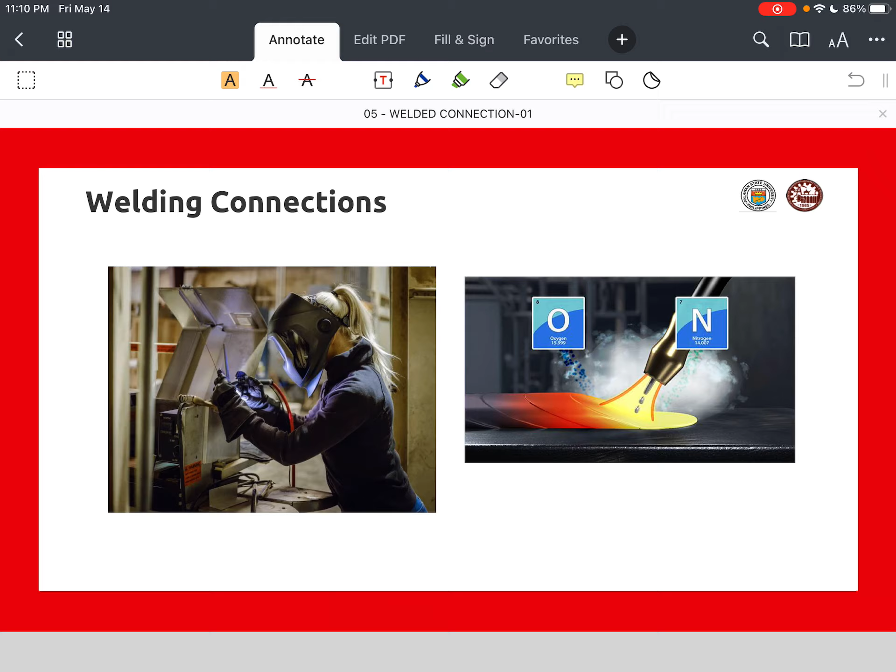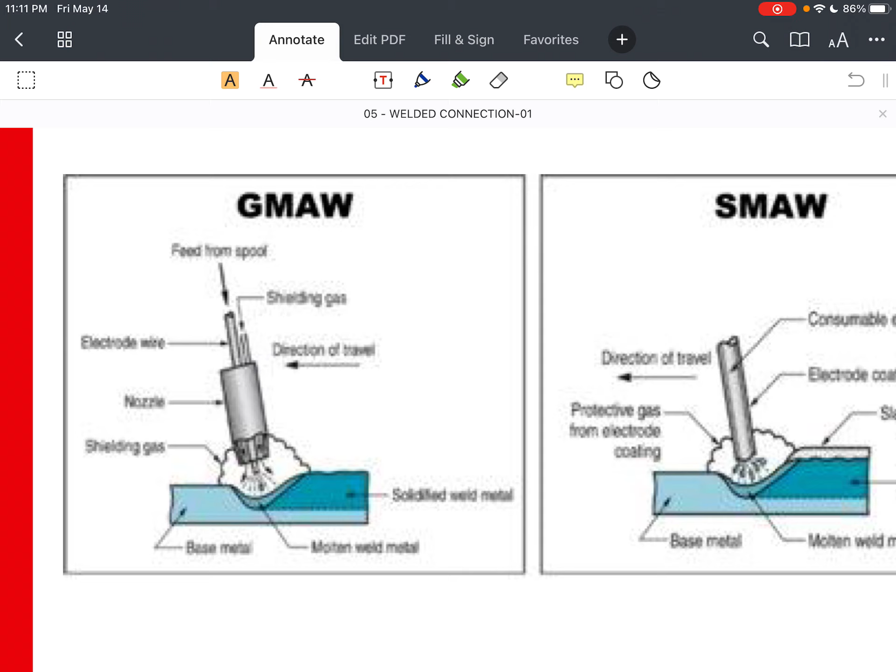Let's go to the welding process naman. So we have here three types of welding process: the GMAW, SMAW, and SAW. Punta muna tayo dun sa GMAW. GMAW stands for Gas Metal Arc Welding or simply gas welding. So, ito yung mas simple and inexpensive na paraan, mas mura. Usually, ginagamit lang to sa mga repairs or maintenance work, mga hindi mabibigat na welding procedures. So usually, ginagamit is gas welding.

Yung pangalawa naman is yung SMAW, which is the Shielded Metal Arc Welding. Ito yung pinaka-common type ng welding. Itong process ito is very versatile and can be used sa field welding. Yung designation nung welds nito is usually E60XX and E70XX. Yung 60 for 414 MPa and 70 for 483 MPa tensile strengths respectively.

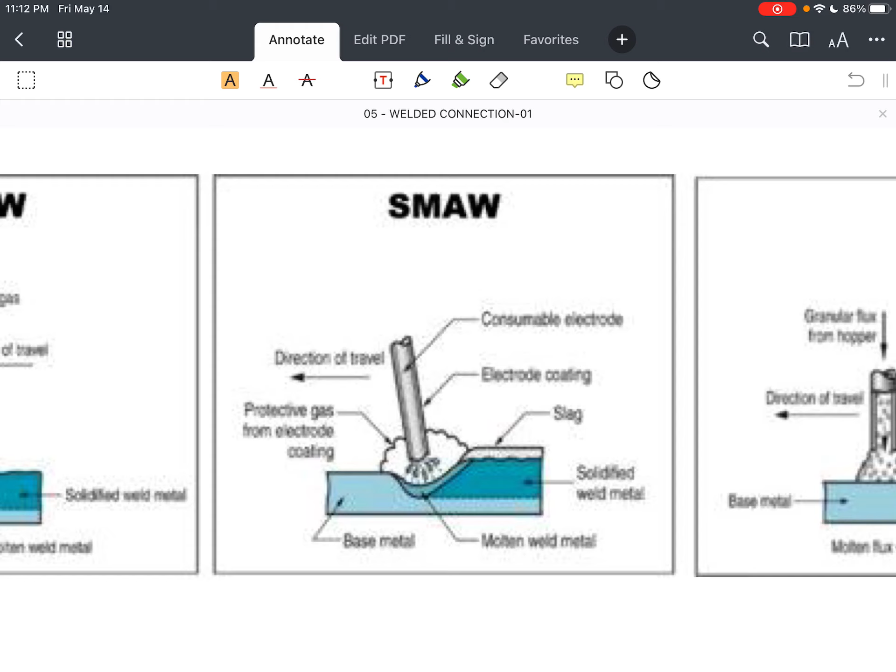Now, the welding rods commonly available in the market is E60. Yun usually yung sinispecify sa mga plano. Dito sa Philippines, ang usually na makikita nyo na specification sa mga structural plans is E60, kasi yun yung mas available pagdating sa market.

So, pangatlo naman na process, we have here the submerged arc welding or yung SAW. Ito naman yung ginagamit sa mga fabrication plants, or should I say ginagamit siya sa planta kung saan merong mga sophisticated na mga equipment na available.

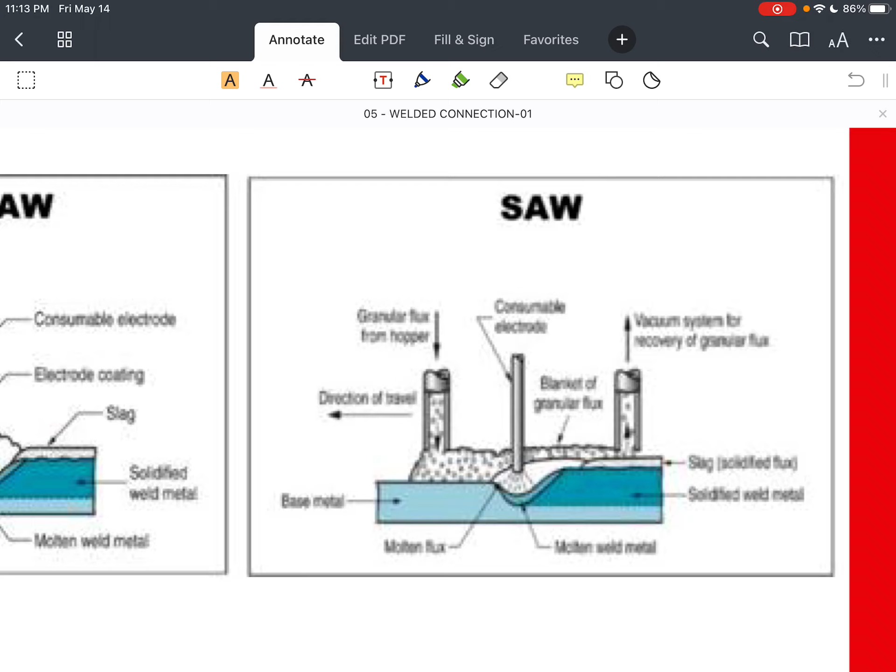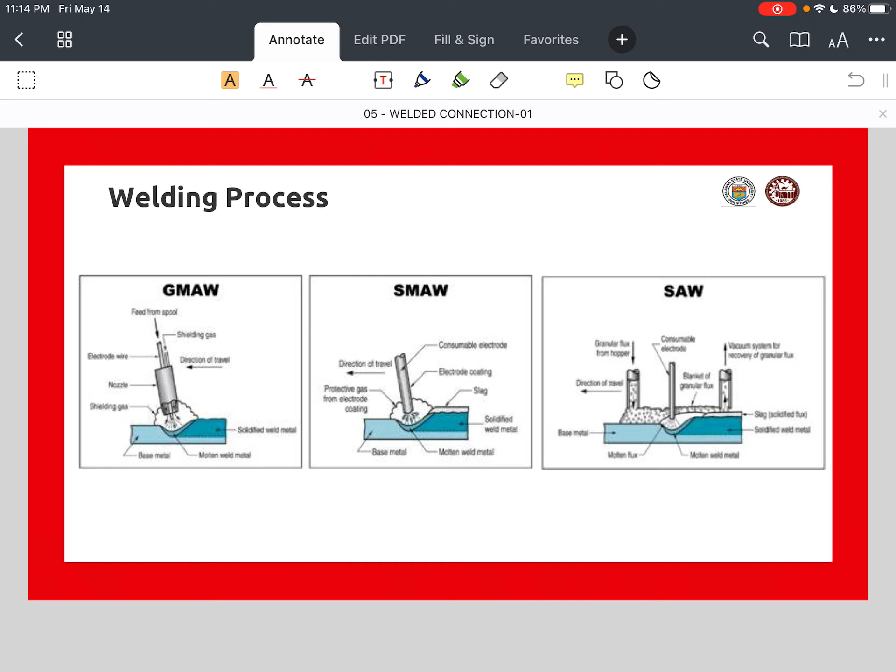Sa NSCP, the NSCP recognizes the SAW as superior among the other welding kasi the weld itself and the base metal is shielded from the impurities in the air, kaya usually sa fabrication siya. So, hindi siya ginagamit pagdating sa site or pagdating sa field. We also have other process, but majority is itong tatlong process na talaga.

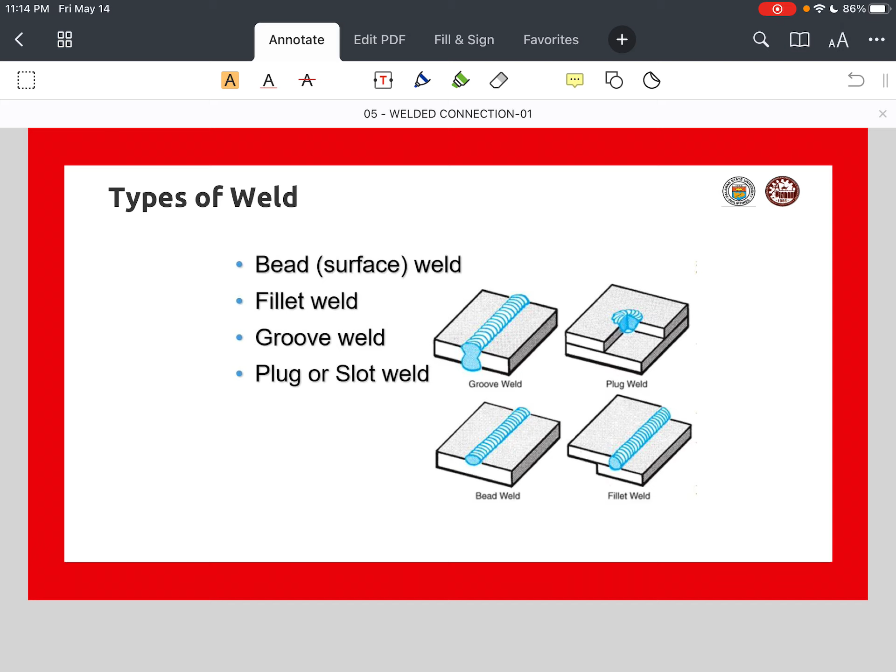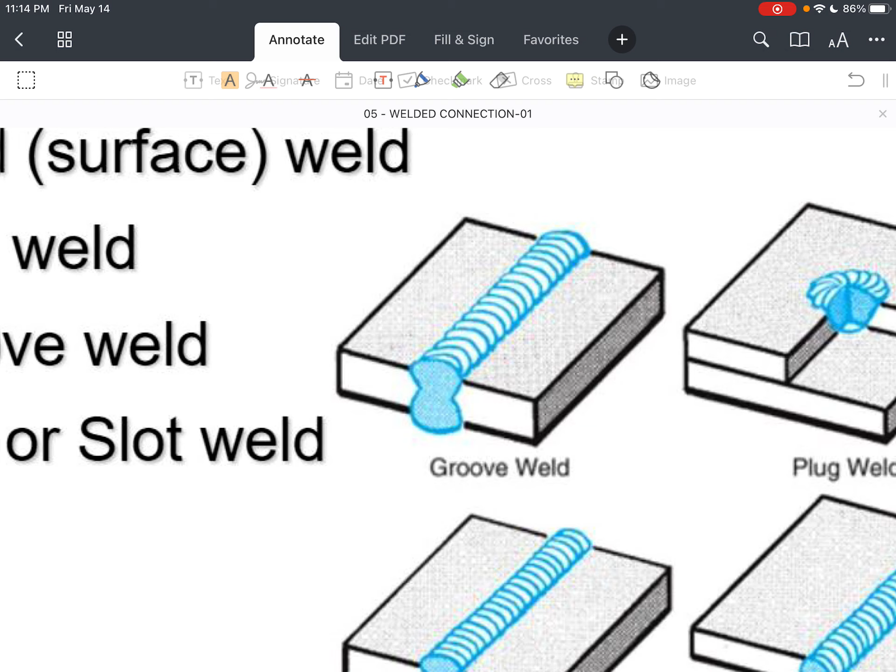Now, let's talk about the types of weld. In this picture, we have four types of welds, but we will just go on to the three. So, first is the groove or butt welds. The use of groove welds is to connect structural members na naka-align sa same plane. So, meron kang, let's say, we have here